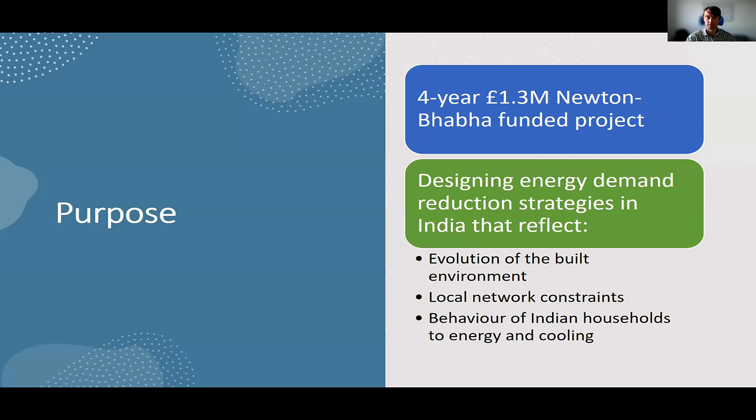So the CEDRI team was ourselves at Heriot-Watt University leading the project, alongside IIT Delhi, NIT Trichy, IIT Bombay, and also a team of industry stakeholders as well. So there's a good mix of organizations, but a good mix of disciplines and skill sets as well. So the starting point, really understanding energy demand in India from a built environment point of view.

So as building modelers, sometimes we do like to think of typical buildings, average buildings, to make things easier for ourselves, particularly when we're looking at stock modeling and energy system modeling and that type of thing. Of course, in India, that's something of a challenge. So these are pictures of buildings that we were looking at through different case studies.

So at the top, we have a fairly recognizable apartment block. In the middle, we have a temple complex, which is in the middle of one of our case study communities, which I'll mention in a minute. And then at the bottom, you have something which is maybe more immediately recognizable as the kind of urban sprawl of urban India, in this case Delhi.

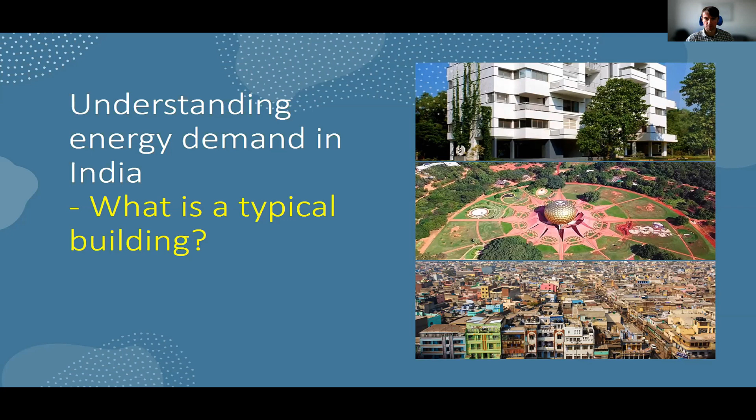So even asking the question of what is a typical building for this kind of project becomes slightly fatuous and not a particularly useful question, actually. And I'll take you through our approach to that in a minute. And then, of course, with India, for a project that's trying to look at future scenarios and where things are going, dealing with the scale of change that's projected across the country, but also regions of India.

So first of all, India is projected to have the highest population of any country in the world, only a few years from now, but certainly that steep growth of population is important to note. And also it's not just an increase in number, it's the makeup of that population, the growth of the middle class, the growth of households with disposable income who might be purchasing certain technologies that we then need to reflect within our building modeling.

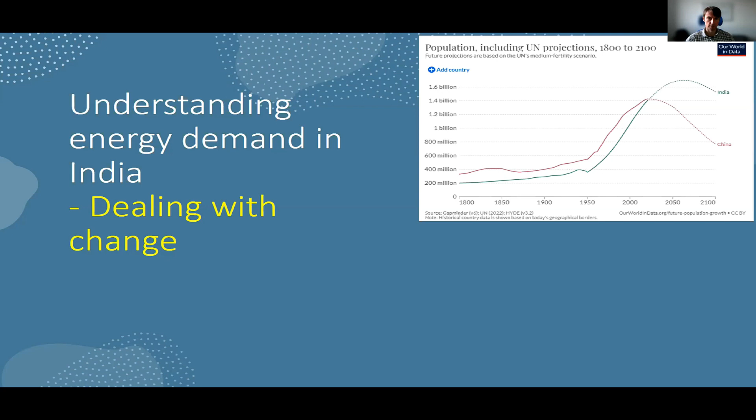These are all things that we have to think about. It's the kind of messy context which as building modelers we maybe would like to avoid, but we have to somehow get our heads around to do good future scenario modeling. Of course, climate change is as important to India as anywhere. The difference with India, particularly if we're looking at cooling, is that there's already very high temperatures being experienced in some of the communities we're looking at, and climate change is exacerbating that problem, but it's not necessarily driving the growth of cooling.

As I'll touch on later, that growth of cooling is maybe coming from socioeconomic factors as much as climate change. And then the overall energy demand in India, some of the projections are quite eye-watering for the next 10, 20, 30 years, and the role of the built environment with that. And then, of course, how the energy supply infrastructure might deal with meeting that demand is quite a challenge.

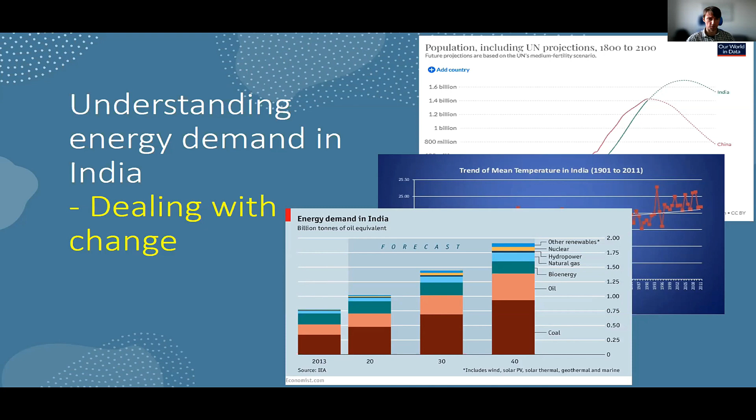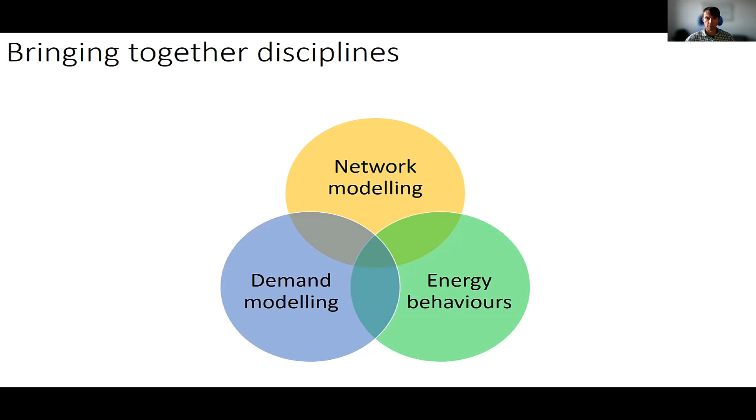So these are all contextual things that we're trying to understand. We can't answer all these questions with a fairly limited scope of a research project, but we do have to try to reflect them in our modeling. And I mentioned in the presentation I gave yesterday, which is a bit more technical, the different strands of the work and the different processes that we went through. So we had these three areas: network modeling, demand modeling, and energy behavior assessment that we carried out within CEDRI.

Within the network modeling, we're looking at network characteristics, how the grid might evolve in the future to deal with new demand profiles, and the resilience of that network to future change. How much upgrading of that network, how much new infrastructure is required just to deal with the expected changes of demand, a lot of which will be driven or certainly affected by the growth of cooling in the residential sector, which is what we were particularly majoring on.

Demand modeling, we looked at different techniques to, first of all, synthesize the demand, and this is in the BSO paper that we presented, so I'm not going to go into this in a huge amount of detail, but essentially measuring lots of electricity demand data for our case study communities, but then trying to synthesize the profiles and the characteristics so that we can perform better aggregation techniques to link individual building assessments with local network level energy assessments. So that's a key part of what we were doing in the project.

And also using, dare I say, a bog standard dynamic simulation to try to understand the impact of various demand reduction techniques, particularly around cooling, particularly around the sort of very complex interaction between ventilation and cooling systems and the choices people make to achieve some level of thermal comfort in their dwellings.

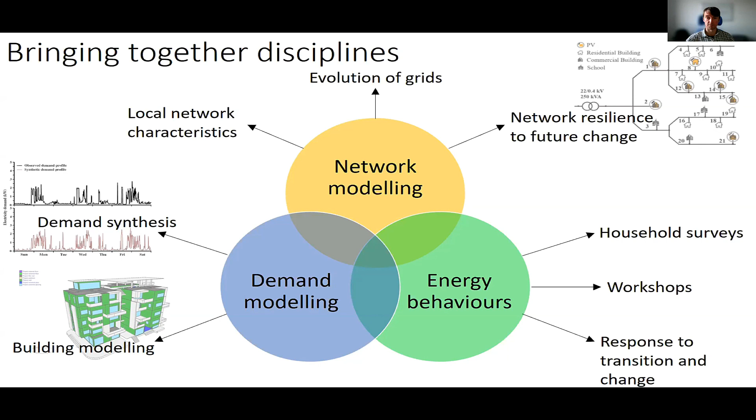So we didn't want to be this project that comes along with some top-down solutions to say, well, this is how you reduce your demand, or this is how you manage your demand in the future. There you go. There's a set of solutions for you to go away with. We want to try to understand the behaviors, why people use energy in the way they do, and try to get the householders themselves involved with that process of designing, in particular, a kind of local cooling strategy.

So our main case study was in Auroville, in Tamil Nadu, in the southeast of India. Absolutely not chosen due to its typical nature. This was a slight concern, I think, from the Indian funders, because they want findings that reflect the whole of India, quite understandably. But our approach was always, you can choose any community in India, and describing it as typical or average would be somewhat tenuous.

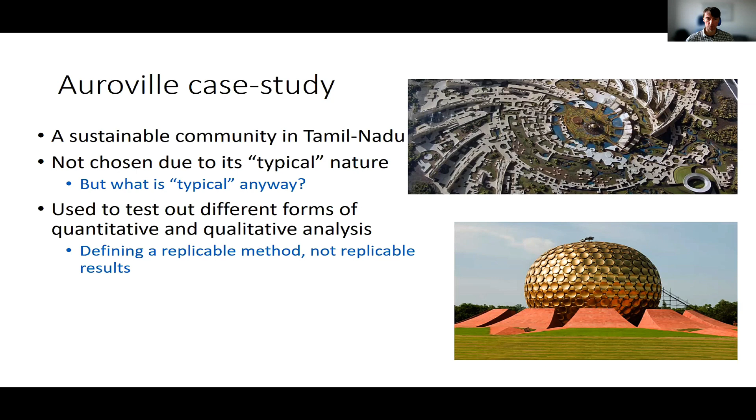So we're not really looking to pull out a case study of hundreds or even thousands of homes and then saying we can extrapolate these answers to the rest of India. We're looking to test out the quantitative and qualitative methods that we're developing with a well-known case study. So this was a case study we've worked with before. And then we're able to potentially run those methods for other communities as well. So we're looking to replicate the method, but not necessarily replicate the results.

And in terms of the kind of questions we might ask these methods that we're developing, let's take a fairly specific one just to take you through some of the processes we went through. So we might be asking, what's the difference between current and future demand experienced by local networks serving a community? So we're trying to understand that evolution of demand and what that means for the local energy infrastructure. And we're taking a fairly building modeling centric role in that.

So that's kind of the starting point of a lot of this. So we have our measured building energy demand data. We have our building physical data. We have a good understanding of the householders themselves through the responses and the engagement that we've conducted. So our approach, and this is a very simplified approach of what we were doing, was to measure and then synthesize the demand for a certain number of buildings that we might need. That allows us to create this bridge between individual building assessments and something that can actually speak to a network level, a local network level model.

So this is a scaling jump that lots of projects have come across, this idea of trying to use detailed building simulation or detailed building data analysis, but then extrapolate that to a level that you can actually talk to the network. So we're talking about hundreds of buildings if you're talking to a kind of feeder substation level. So we're able to do that through techniques that are described in the paper.

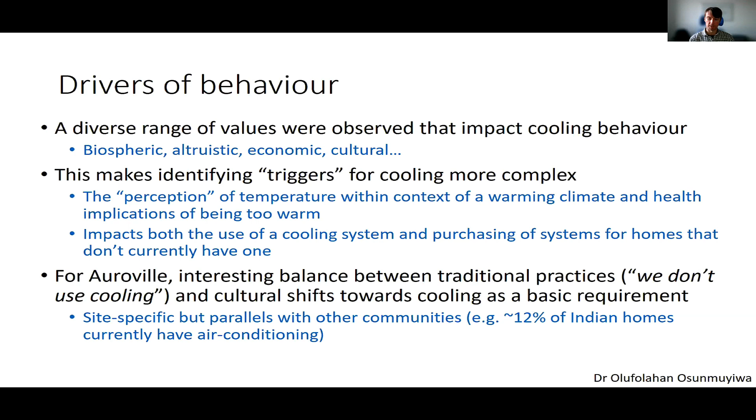So what we're seeing across India, not just this case study, is that we're going to be going from a very low penetration of cooling to potentially a much higher penetration of cooling in Indian homes. And some of that will be cultural changes, some of that will be socioeconomic, just people have more access and more affordability for these technologies. But this is something that's likely to be repeated for different reasons in other Indian communities.

So just to finish off, as I think I'm a couple of minutes over, which Sukumar said was okay, so that's

fine. So CEDRI was trying to combine these qualitative and quantitative techniques for community level energy analysis, and that worked well for the communities that we had good understanding of and good contact with. But of course, the flip side of that is, well, how could you repeat this analysis for less data-rich areas?

There is lots of data around India, but it is slightly sporadic. It depends on a certain area. You'll find one area that is quite data rich, other areas where the building stock or perhaps a high penetration of informal settlements means that you know less about those buildings, and that's a challenge.

In developing countries, clearly defining future scenarios is crucial because of the rate of change. I mean, you finish a building modelling exercise and you question whether your building model is now out of date. So you need to accommodate these external factors that are going on. And unfortunately, or to make matters more difficult, that does mean understanding the occupants and what they're doing, which, as I keep saying, is quite a difficult thing to harness into a sort of traditional building modelling exercise.

And we might question whether building modelers do this. I know we had a discussion yesterday about whether building modelers are literate. There's maybe a subsection there where we discuss whether building modelers understand people or have an interest in understanding people. That's perhaps a separate discussion.

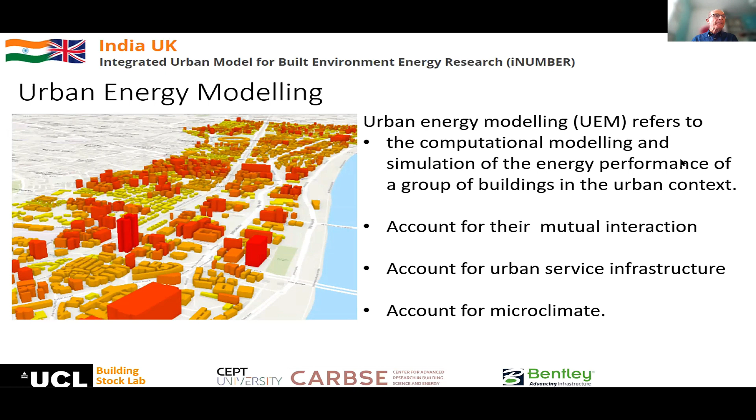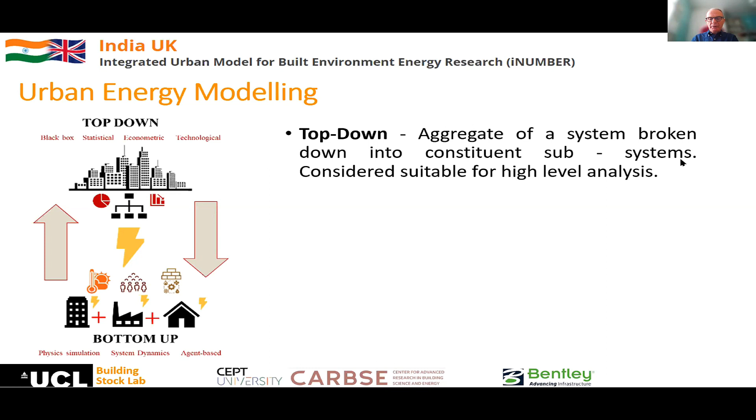When we talk about urban energy modelling, there's often this debate about top-down and bottom-up, and a lot of the work that's done on understanding the energy performance of the building stock is top-down. It's statistical. It tends to be a little bit of a black box. It divides up the energy use at national level into segments of the stock, be it domestic or non-domestic.

But we also have a sort of hybrid form of modelling where we have representative archetypes of individual buildings, different types of homes, different types of non-domestic buildings, which we model and then scale up to represent the stock. And that technique is useful when it comes to understanding possible generic solutions or generic approaches to improving segments of the stock. But it doesn't help if you want to actually look at things spatially and look at the interrelationship between buildings and understand the buildings in context.

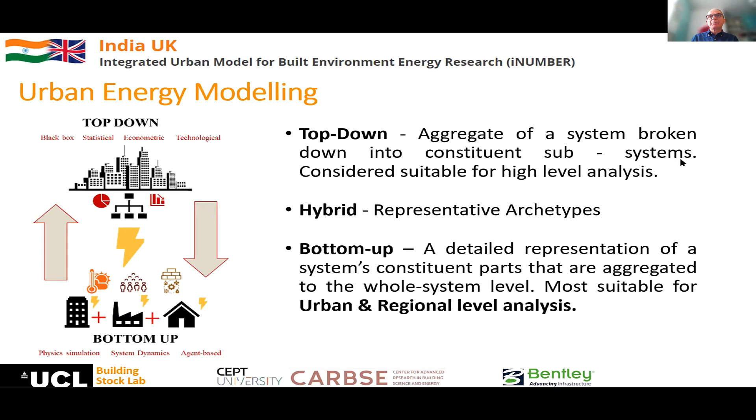And for that, we need really a bottom-up approach that takes a much more detailed representation of the buildings and systems that operate in an urban environment. And these models have been in development for some time. At UCL, we've been developing three-dimensional digital models of the entire building stock for close to a decade now. And if you look at where these models are, you'll typically find that they're in the Northern Hemisphere.

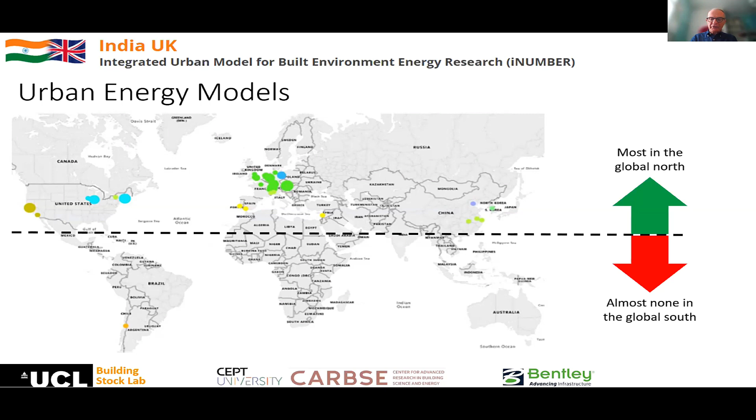And they tend to benefit from the fact that in many cases there are good data sources, and they also represent an approach to modeling which relates to particular climates. There's virtually none in the global south. The data sources and the sort of climatic challenges are somewhat different. And we felt within the project, the iNUMBER project, that we needed to address this, that we needed to start to think about how these urban scale models could be developed for locations in the global south.

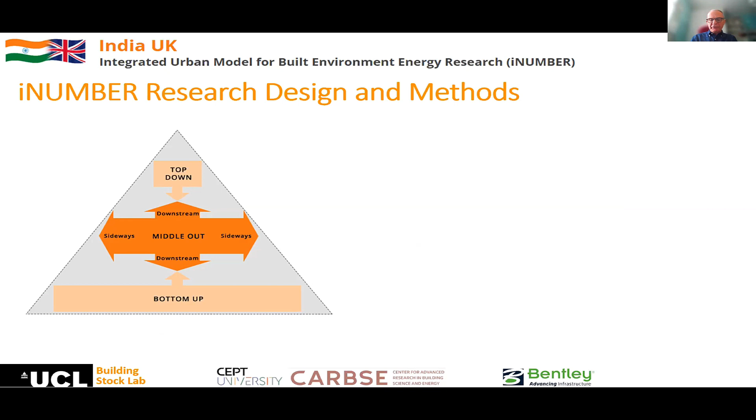And in order to do that, we looked at this model of top down and bottom up and decided that what was critical was to have a middle out. We needed to understand how we can bring these things together in a modeling system, to take account of the building stock in the city, to look at the municipal energy services, and also to understand in a little bit more detail the actual residential energy use.

So the project involved three primary work packages: modeling the building stock and producing a digital representation of it. Work package 2, which brought in the municipal services, in particular water supply and pumped water supply, which is a very important energy use in Indian urban situations. And work package 3, which actually involved monitoring of performance of individual residences in areas in Ahmedabad.

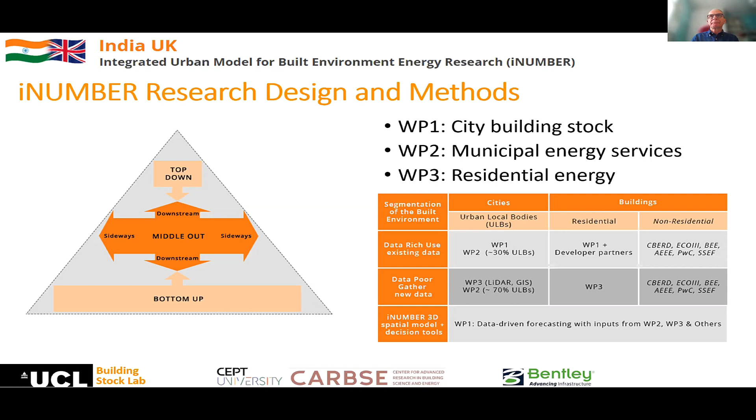For non-residential buildings, we were able to draw on prior work that had been taking place at CEPT University from projects like CBERD. To undertake the analysis of the urban fabric and to understand the makeup of the urban context, we employed some techniques of photogrammetry to gather large area photographs from different angles, so that you can produce a very detailed composite visual image of the urban fabric.

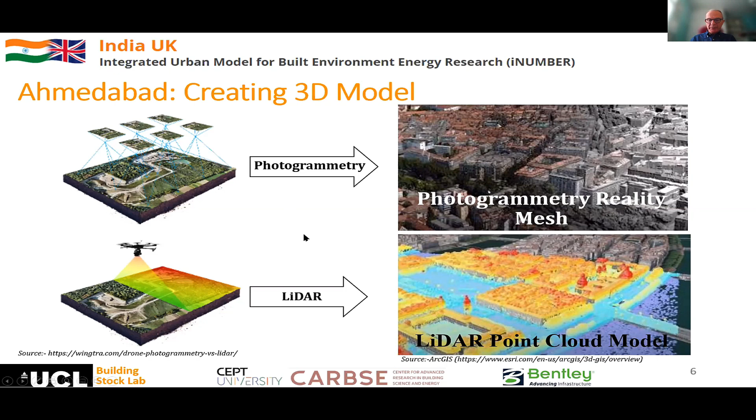The illustration at the bottom shows how you can do this also with LiDAR, and that's the way typically we do it in the UK when we're building our models, because we're very fortunate that the Environment Agency in the UK undertakes a fixed-wing LiDAR survey of the whole country. That doesn't exist in India, so we've had to use a drone flight system where we have gone out to individual areas of the city and flown drones backwards and forwards, capturing this photogrammetry information. Now, that's a reasonably time-consuming exercise, but worthwhile given that it captures such a rich level of detail.

But of course, photographs are interesting to look at, but they're not much use when it comes to producing a digital model. So using technology provided by Bentley Systems, we're able to translate these photographs into a three-dimensional digital mesh that provides us with detailed information about the shape and size of the buildings, which can then be overlaid onto the building footprints from other sources.

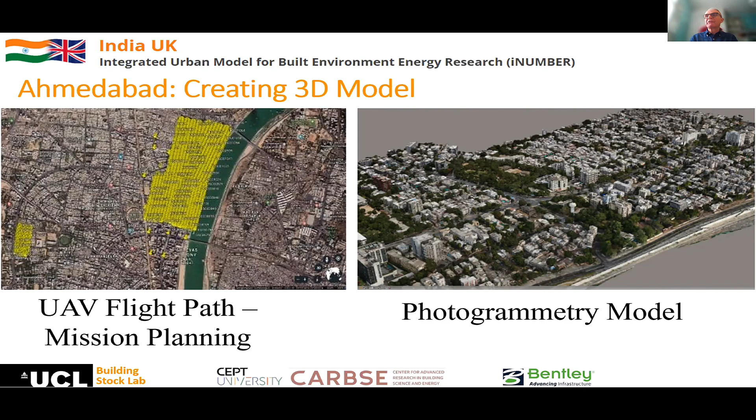But one of the key challenges here in an urban environment such as Ahmedabad, where we have a lot of trees and other material around the buildings, which can in some cases confuse the picture. You don't necessarily understand where the buildings end and the trees start. You have to try to disentangle these in order to get a much cleaner three-dimensional representation of the building.

And a large portion of the work that was undertaken in iNUMBER was to develop methods in order to do this using machine learning and artificial intelligence. And those have actually been proved very successful, and they also form a legacy that can be used in other contexts now.

To build the full model, you don't just need the digital representation of the shape and size of the building. You need also to bring into that the description of the construction materials, the amount of glazing, and quite obviously also the way that the buildings are occupied and operated. Sometimes you can get additional data on some of these factors, but mostly you're making assumptions or using data that comes from the sorts of case studies that David has just described, and evaluating sensitivities and scenarios in order to develop meaningful results. And this is just an illustration of the workflow that goes into producing the final models here.

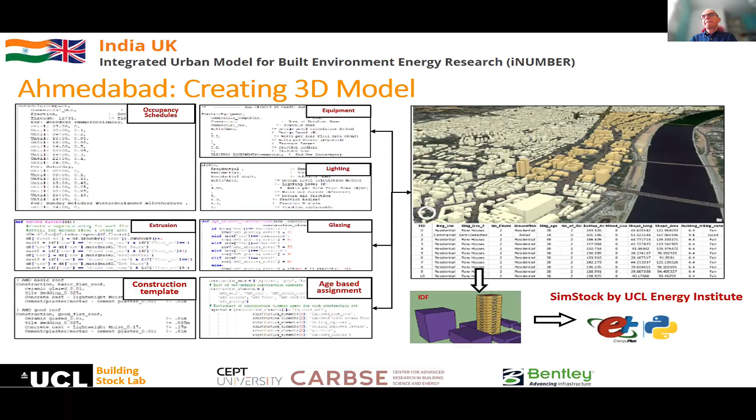So the iNUMBER project finished a little while ago, and the model that has been produced is now being used for these types of scenario analysis in collaboration with the city of Ahmedabad. But it also produced some very useful relationships between UCL and CEPT University and other parties, such that we were able to move on and develop further projects, which I think is always a valuable aspect of any research project.

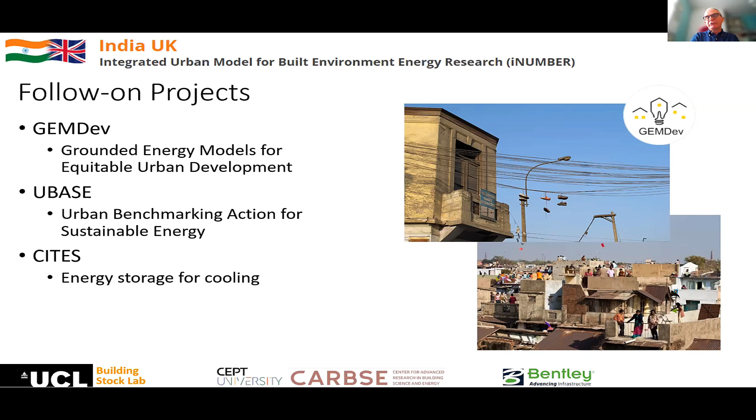And finally, relating to the subject of cooling, which we know will inevitably increase in India, as David's already pointed out, looking at techniques by which cooling energy can be stored in order to distribute and minimize the peak demands on the grid. There's a project called CITES, which is also spawned from the iNUMBER project.

So that was a quick summary, not as detailed as David's, but I'm happy to answer questions in the Q&A session. Thank you very much.

Brilliant. Thanks, Paul. I think it just goes to show just how diverse and varied the approaches are across the projects, and also the shared similarities, especially in terms of the central challenges that each of us has explored.

So there aren't any questions in the Q&A channel yet, so I think I'll defer to Rajat to present RESIDE. So Rajat's already started sharing his screen, so over to you, Rajat. Can you see the slide mode? Yep. Okay, great. Yes, I can. Okay, good.

First, I'd like to thank Sukumar for bringing us all together as this kind of cohort of projects that got funded. So thank you, Sukumar, for the session. It's really good to see what all we've achieved actually over the last 4 or 5 years.

So what I want to do is talk about RESIDE, which is one of the 4 projects. This is particularly focused on residential building energy demand in India. And this is led by Oxford Brookes University in the UK with IIIT Hyderabad, Vishal Garg, and MNIT Jaipur, Jyotirmay Mathur.

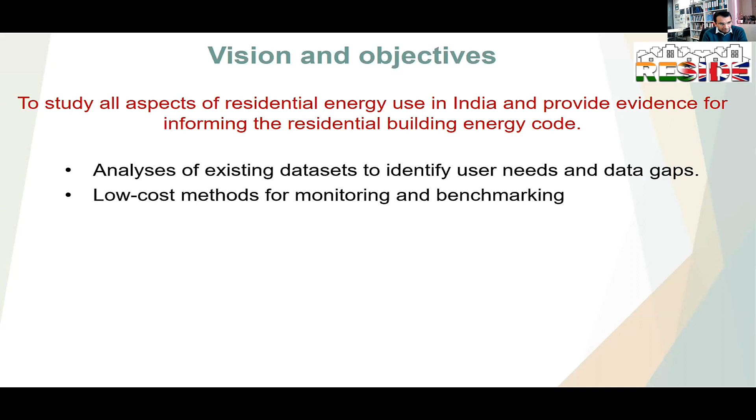And to do so, we had a number of objectives. So we started with analyzing what data sets were there in terms of residential energy and thermal comfort, and what were the user needs and data gaps. We wanted to develop low-cost methods for monitoring and benchmarking. We established energy demand patterns.

We also then looked at smart home energy management systems and undertook studies of recently built dwellings through post-occupancy evaluation methods. All the data then was designed to feed into models, both at building and community level. And constantly the purpose was to provide policy support for the residential energy code.

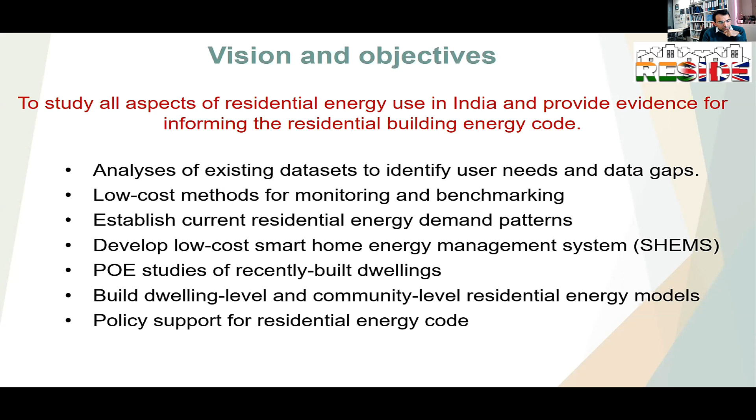We developed a range of tools. We think they are quite practical, ranging from an online repository on residential energy and thermal comfort studies, an online survey approach to be able to gather socio-technical data on residential energy, a dashboard on visualization and analytics of the monitoring data, and mobile apps to provide energy feedback and smart control.

We also managed to get a smart home annex in the residential energy code and develop archetype models which could be used going forward to run different scenarios. We were passionate about developing data sets, not just papers and knowledge and tools. So empirical data sets have been created, which can help with some of these measurements. And then obviously stakeholder engagement all the way. So I'll take you through some of what we have found.

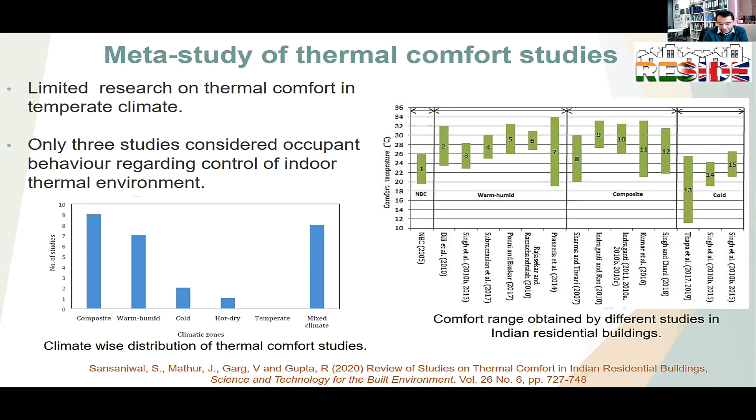In terms of new knowledge and insights, we started off by looking at what was out there. And that was looking at thermal comfort studies. And we found that there was very limited coverage across different climatic zones, especially temperate climate. Very few studies considered occupant behavior. And the studies that considered it were giving very different results, with very different ways of data collection as well. And that got published as well.

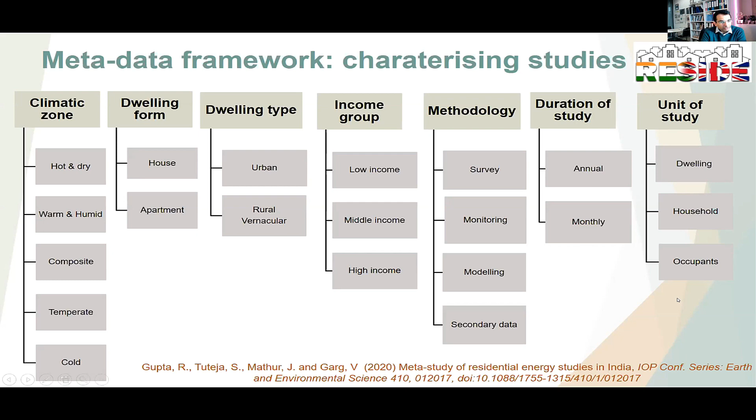So we put forward this metadata framework to characterize studies: how do you look at dwelling type and income group, what methodology they were using, how long, what was the unit of the study, and whether they were occupants, household, or dwelling.

We also then started our large-scale monitoring campaign with a pilot study, which was about 20 dwellings in Hyderabad. And that was very useful because that gave us an idea of not just what was coming out in terms of findings, but also our methods. And obviously, some things were unexpected. Air-conditioned homes were using a lot, about 200% more in the peak period.

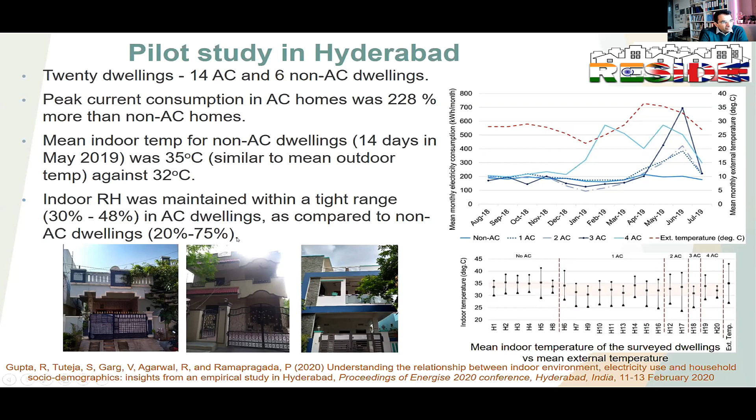The indoor temperatures were all much tighter and had a narrower band in air-conditioned homes. The same with relative humidity as well. But interestingly, what we found was when we started to do the field studies, there were lots of issues related to technology. So initially, we had thought of using internet connectivity, but because of this, we realized it needs to be more local and Bluetooth enabled, because internet is not getting around all the time.

There were also technology-to-person interaction issues and challenges, where we were trying to put these loggers on the main circuit board, and that's not always easy in an Indian context. And where do you locate these loggers? And then also person-to-person interaction. The electrician we hired for installing our loggers was being used by householders to do additional electrical works. So how do you manage those householder expectations without jeopardizing their participation? Those were very practical issues that emerged from starting to do this kind of field work.

We then, as the data came in, started to look at socio-technical factors that influence residential energy use using regression models. And we found that number of occupants, presence of air conditioning, income group and size had a big effect on residential energy demand. We also looked at the relationship of residential AC with indoor temperature and relative humidity.

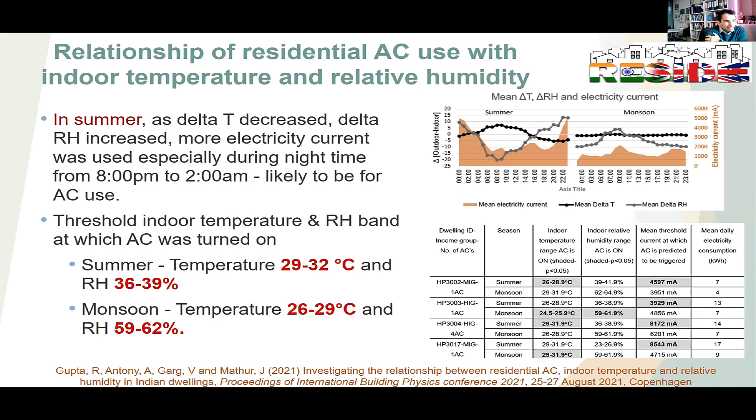We were trying to find trigger temperatures at which air conditioning would come on. And it really was showing in the summer and monsoon season that at about 29 to 32 degrees with a relative humidity of 36 to 39% was around when air conditioning was being turned on. Slightly lower temperatures in the monsoon season, but higher humidity. And then we compared that against what the National Building Code said, and clearly there were savings potential there.

We then also looked at a large data set, just under 5,000 households, to really look at this variation in electricity use across all climatic zones, different seasons, income group, presence of air conditioning. And the variation was prevalent. That is something that needs to be accounted for in the energy code. At the moment, it's a single energy code for the country, and it needs to account for climatic zones, seasons, income groups. And that's important for the take-up of the code.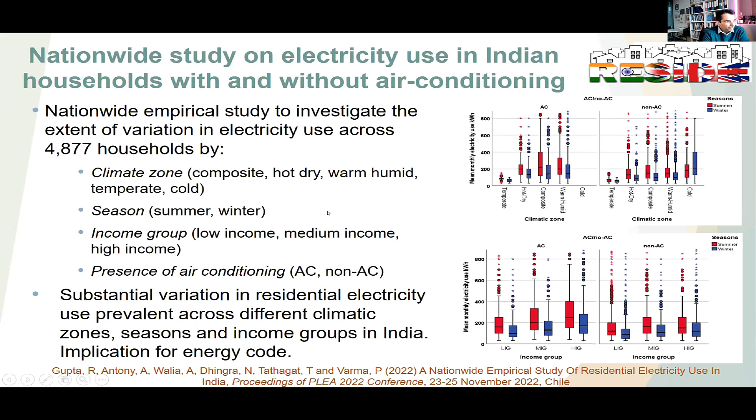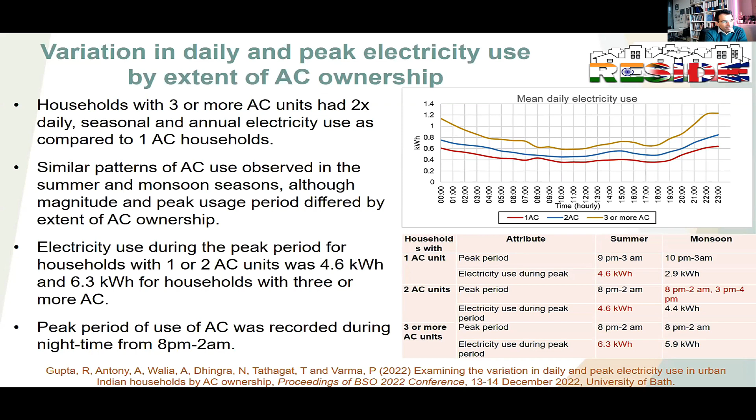In fact, homes with 3 or more air conditioning units can have double the amount of daily, seasonal, annual electricity use. And in the peak period, they could be using over 6 kilowatt hours from 8 p.m. to 2 a.m., which could be dropping to 4 kilowatt hours for homes with fewer air conditioners. As home working becomes more prevalent, as more homes start to get air conditioned in multiple ways, this is a problem which will need to be addressed to avoid brownouts and blackouts.

A number of papers, again, like other projects, have been published. They're available on the website. And then we got some recognition. One of the papers won an award at a conference, so that was quite good for the Indo-UK partners. And then there were a series of technologies that came about. I think this is particularly something we are proud of.

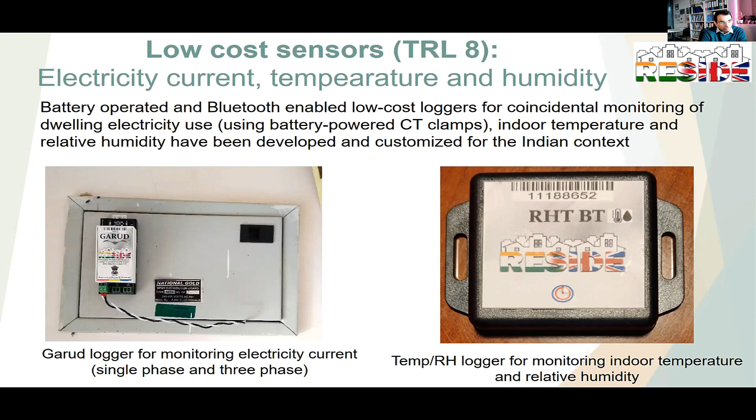This is a low-cost logger for monitoring electricity and indoor temperature and relative humidity. It cost about $20. It wasn't easy to develop and test and calibrate, but it's much cheaper than what we use in the UK and was necessary for doing a large-scale campaign.

We also developed the smart home energy management system, which has got its own energy meter, window opening and closing sensor, humidity sensor, smart sockets, and occupancy sensors to help with smart management of energy use, and it's being deployed in 10 homes now. Before that, we had a test bed for the system in the lab to test out what works and what doesn't work, and that was a very interesting exercise to do.

A lot of tools came about. We started off with this online repository of metadata, so you could do customizable searches based on what papers had been published on residential energy and comfort. We also developed an energy survey protocol to enable large scale data gathering, and different survey forms and other things have been produced, and they're available online.

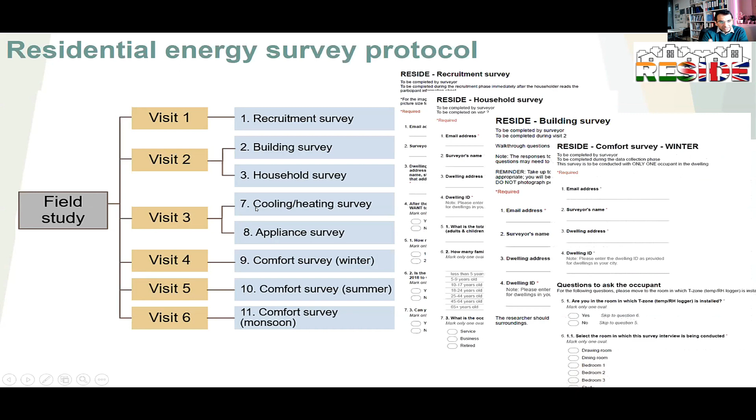Building survey, household survey, cooling survey, appliance survey, to really provide that contextual information to understand what is happening and why is it happening, alongside the monitoring data. We've also created this dashboard to bring the data together to enable users to query the data in their own ways. We can't write all the papers, we can't create all the research questions, and there are many more out there. And from day one of the project, we've been passionate about making things open.

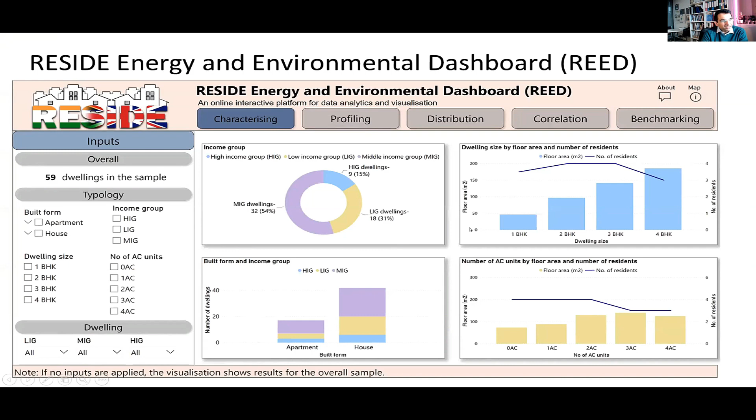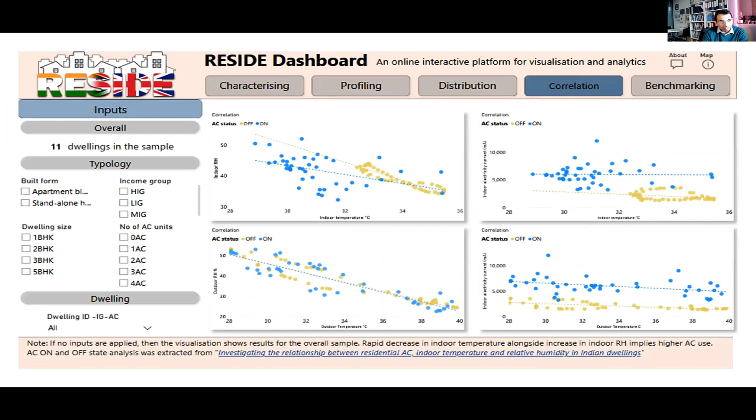So you can take the data and characterize it. You can profile it and do your own selections in terms of what periods you want to see in terms of indoor temperature, electricity, relative humidity. You can start to do some queries on distribution, scatter plots and other things. And then also start to benchmark it. So try and see the indoor temperatures of those homes, which you can search by built form, income group, dwelling size, number of AC units. How does that compare with IMAC? Or with the NBC, the National Building Code maximum, minimum.

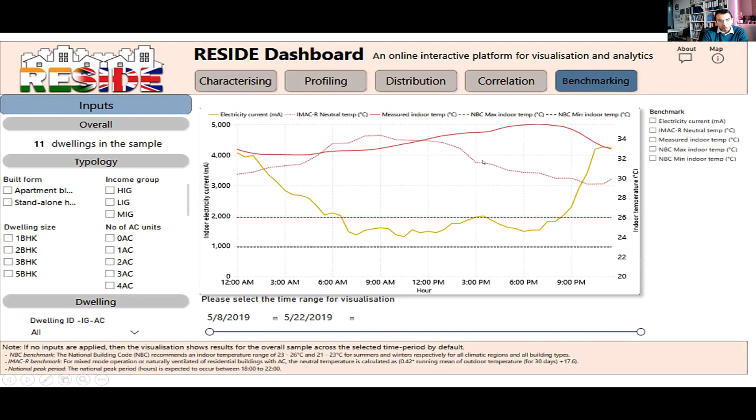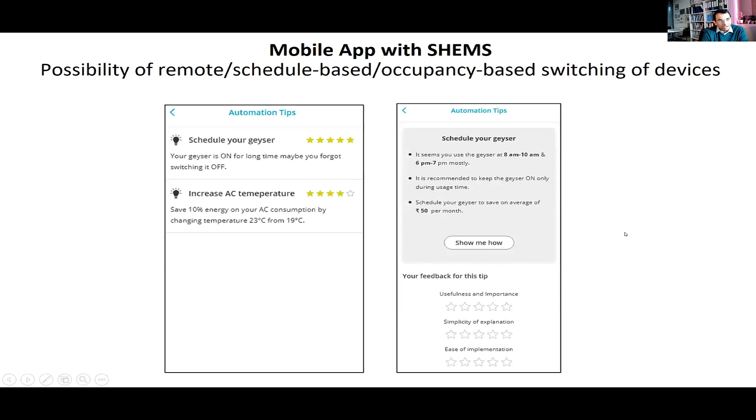We also created these mobile apps with accompanying smart home energy management systems to provide trend analysis. These were given to householders on their mobiles, so they could see how they were performing themselves, how they were performing against their own neighborhood. And then some smart controls, how they could schedule the geyser or the air conditioner. And then just to end, in terms of policy support, I think we were very fortunate that we managed to get our Annex E smart home energy management system insights into the code itself.

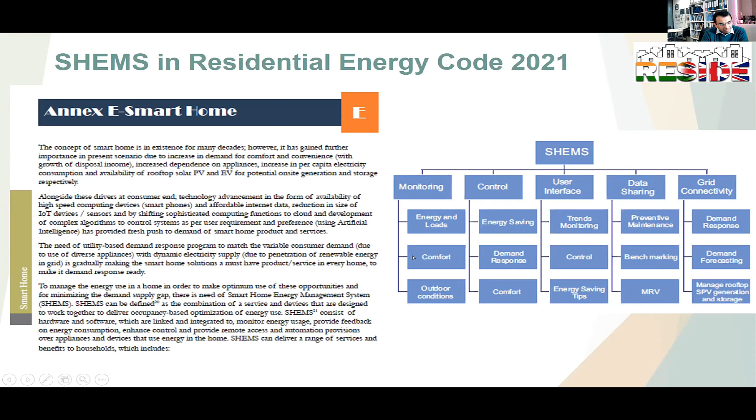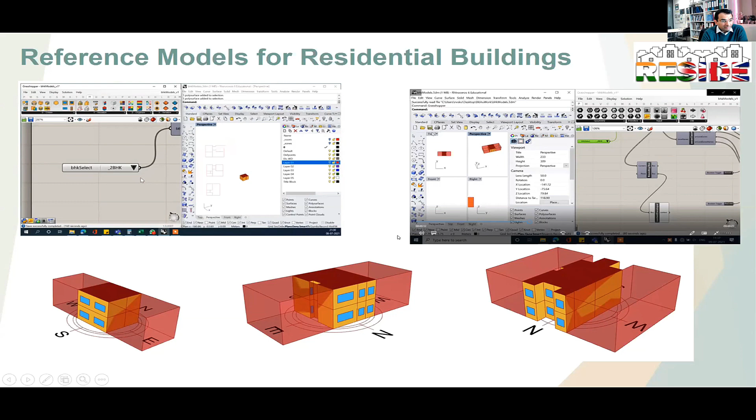Apologies for that. So we managed to get this Annex E in the policy document, which I think is an achievement of the project, covering different aspects of smart home energy management systems. We've been creating residential building archetypes that can be used for different scenarios for seeing what building energy demand reduction is possible for different types of dwellings. We've also created data sets, which have millions of data points. And in the next year, hopefully we can release some of that for wider consumption and usage by the academic community.

And then finally, stakeholder engagement has been absolutely essential. It's helped us in refining our own methodology, keeping in mind that India is very diverse and varied, and how we need to keep everything anonymized despite our large scale data gathering exercises, and how necessary that is for future policies. There is a website where most of what I've said is available.

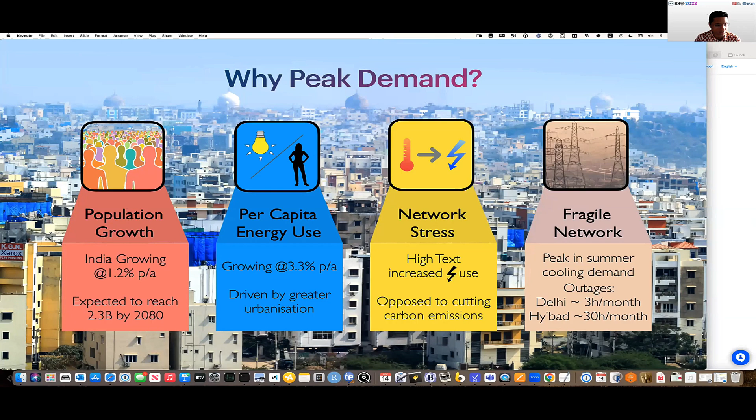So obviously that's not great, because if you're firing up coal or gas to manage that peak load, that's not really great in terms of cutting carbon emissions. And of course, that creates fragility in the network itself. Even now, in parts of Delhi, even though things have much improved since I was a child, we get significant outages of maybe 3 hours, and in some other parts of the country maybe even 30 hours a month. So it isn't just simply access to energy, it is the quality of energy supply, the stability of the supply, and things like fluctuating voltages that are a huge issue.

Now, the fact is that the growth in demand far outstrips the growth in supply. So even if you have access, you might not actually be able to meet your comfort needs. And this resulting loss in productivity and economic growth, someone has measured to be approximately 5% of India's GDP per annum. So whilst mean demand is increasing, at the moment mean demand is only about 13% that of the UK. So per capita, an Indian household is only demanding about 13% of the energy that a typical UK household might be demanding. But peak demand is obviously a huge problem.

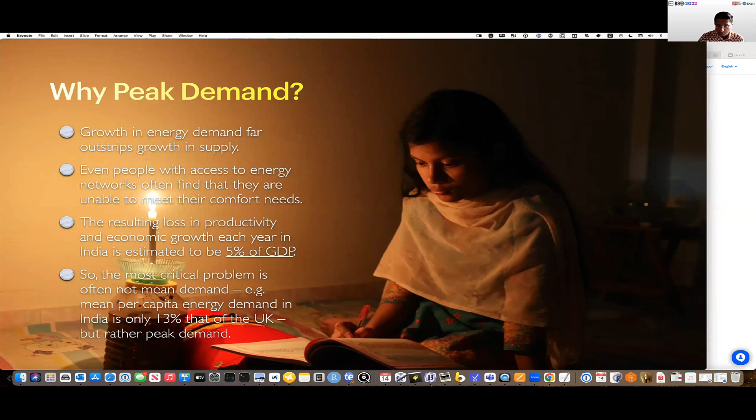So we came together as a bunch of universities and institutions. Bath is the UK lead on the project, and IIT Roorkee, and Rajasekar is here with us on the panel today, is the India lead on the project. Rajasekar and I had previously collaborated on smaller endeavors, and that's how we were able to build up this relationship. In addition, CBRI, the Central Building Research Institute, also based in Roorkee, came in, as did IIT Delhi. So this was a large team that was assembled.

I haven't mentioned everybody's name, just in the interest of time. Looking at the research questions on the right-hand side: how much peak and mean demand reduction can you actually achieve using different techniques? To what extent are these actually different problems? What are the technologies that are appropriate given India's climate, society, wealth, materials, and skills? And are there any disbenefits in terms of heat stress, particularly under future climate? So these were the broad motivating research questions.

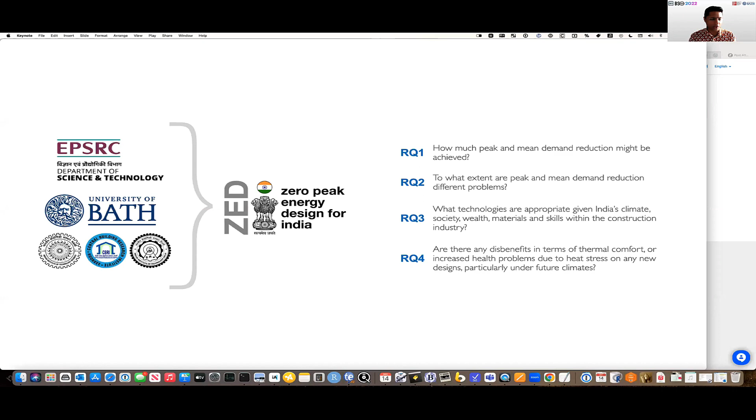I haven't put together a list of the work packages, because I really would like to jump in to talk about some of the outputs we've got. But I would like to highlight some of the possible attacks on the problem we might have taken. Some of these were addressed and others remain unaddressed as part of our work. But I know some of the other projects we've already heard from have been looking at, for example in the bottom left, issues around control, feedback, and things like that. Rajat just talked about it. Comfort has been a major aspect of work. Rajan talked about it yesterday.

And construction, super insulation, thermal mass. David mentioned some of those aspects. And David also mentioned, for example, issues around location and culture, differences in practices and needs.

And I think with David's presentation in particular, it was remarkable that even in a community like Auroville, where you've actually got maybe the most committed, seemingly committed environmentalists who initially came in with the attitude that, well, actually, we don't need air conditioning, even if they are moving towards greater demand for air conditioning, that is a very clear sign that this is going to be an extremely widespread phenomenon as incomes rise and as people negotiate new sort of paradigms of comfort.

The thing that I want to just talk about today, we did touch on some of these aspects ourselves, and Rajasekar will probably be talking about these as well. But the ones I want to just pick up are looking at weather data, because if you're to design buildings, and we have to remember that something like 50 to 60% of the buildings of the future in India are still to be built.

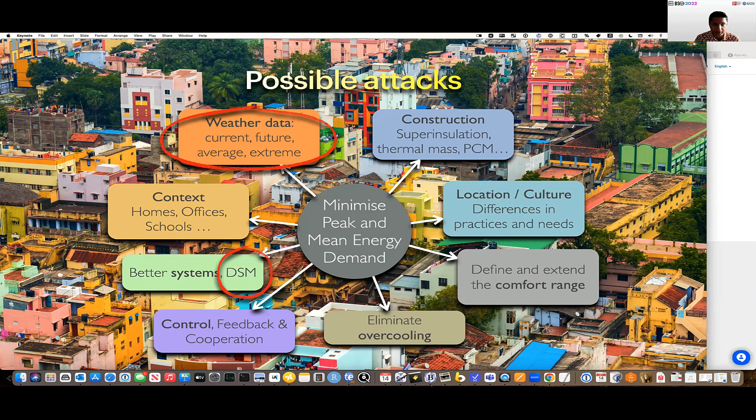The second one was actually the last work package on our project, and it turned into some rather interesting stuff around demand-side management, and I've got some high-level stuff to share with you on that. So just these two for today. Weather files is the first one. So what about weather files?

So as many of you know, these are standard inputs in simulators such as EnergyPlus. The other speakers have already mentioned EnergyPlus as one of the standard simulators, but there are many other dynamic simulation software out there, and weather files are absolutely a core input because the external weather signal defines in a very fundamental way the performance of the building.

The problem is that in India, the weather files that exist, which come from ISHRAE, they cover just 62 locations. But we know from work in the UK, for example, that it's possible that you might have rather large errors in estimates if you don't use localized weather. So something in the range of about 30 kilometers. If your weather file is further away than that, then you're at risk of making a prediction that's really not commensurate with what the building will actually experience.

So this is what the picture looks like at the moment in India. And I'm aware of a project, I believe that this is actually being improved by ISHRAE as we speak. I think it is going to something like a 100-kilometer grid, if I'm not mistaken. But the problem of geographic coverage is only one dimension, because in each of these locations, what you've got is a representation of a typical weather year in the form of a TMY.

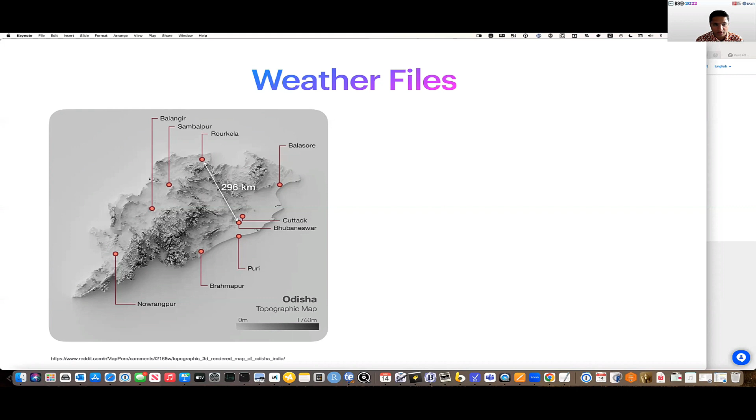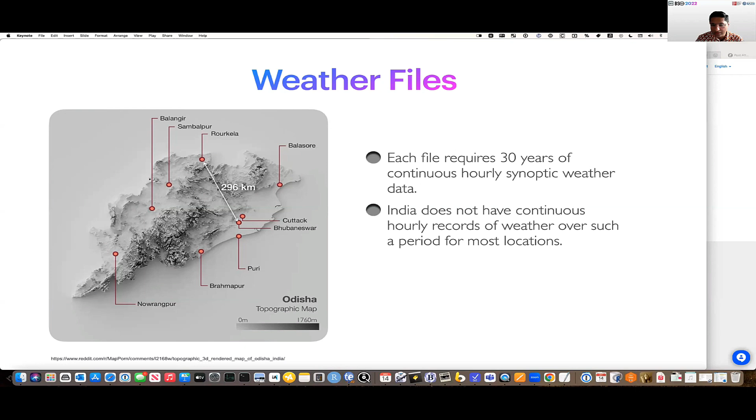So the problems are that we've got this requirement for 30 years of continuous hourly synoptic weather data. These data simply don't exist in India. So much like previous work in the UK, we said, well, perhaps we can solve this using synthetic computer-generated weather data. So we worked with the UK Met Office, who gave us a data set from their PRECIS product, and that covers all of India at 25-kilometer grid resolution.

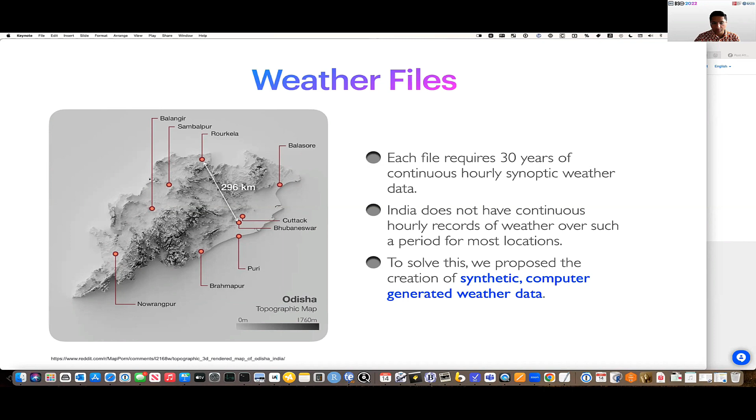With weather data going from 1970 all the way to 2100, covering pretty much all the synoptic variables, and over 17 ensembles. So you've got 17 different perturbations of the underlying physics model. So there was a good amount of variability within the data that we got, from which we could construct probabilistic data sets.

So without going into the technical details of how the files were produced, because we spent an absolutely enormous amount of time making sure they were fit for purpose, it was a significant challenge, and one I think we didn't quite appreciate when we began the project all those years ago.

So what we've got are these 25-kilometer grid resolution weather files, which means that for every 25 kilometers of India's land surface, you can have a bespoke weather file. And not only that, you can have the weather file representing current climate, which is, I think, 1980 to 2010, if I'm not mistaken, which we call the 1990s weather file, and then something in the late 2080s.

So these are represented in the test reference year format. And following on from previous work in the UK, which some of you might be familiar with, these are actually represented in probabilistic terms. Here we go. So 10th, 50th, and 90th. And this is what we've actually done.

So this is a representation of the average summer temperature, which we've taken as March to June, just a sort of norm for 1981 to 2010. And we've marked out Rourkela and Bhubaneswar, which I presented to you in the earlier slide. Wherever you see these little white gaps, those are areas where we are simply not confident the data that we got from PRECIS was fit for purpose. So we've actually left those out.

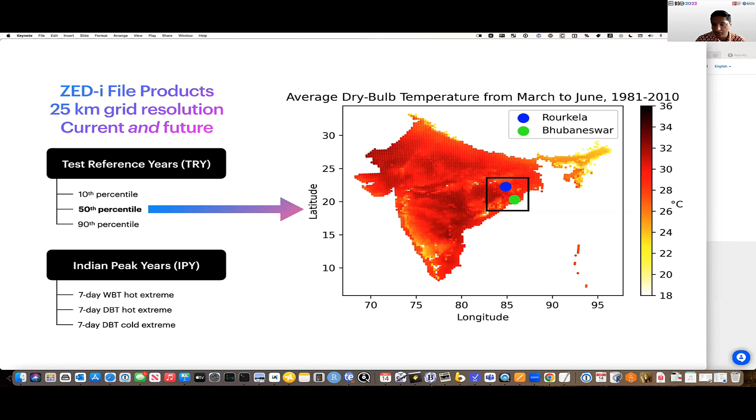But what exists on the server at the moment, and you can download these right now, are the 50th percentile test reference years at this resolution. So let me just show you what that looks like for Rourkela and Bhubaneswar. At the moment, all that exists in this part of the country is that green dot.

And you can immediately see that not only is there a huge amount of weather variation, climatic variation between adjacent cells, but also that things are going to look rather different in the future. The temperatures you're seeing are summer average temperatures for these periods. On the left-hand side is 1982 to 2011, and on the right-hand side is the 2080s.

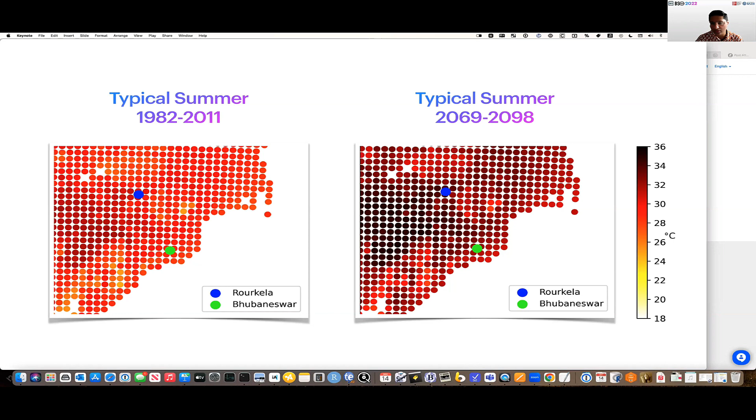So you should end up with this website here, which is zedi.bath.ac.uk. This is the same place where, by the way, we host our UK weather files, which are actually at the 5-kilometer resolution level. So the same website hosts both our UK and India data. All you do is click this Get Started button, choose your country of interest, set the latitude and longitude, which I've cleverly kept a copy of. This is the latitude and longitude for Rourkela.

And it asks you a couple of questions, whether you're using it on a real building project or for academic research. So I'm just going to say no here, and I'm just going to say BSO2022 demo. So that's just so that we can keep a track of where these data are being used. So we encourage people to use them because the data are completely free. And apart from that little bit of data collection, you don't have to do anything. So when you do that, you're able to download your data.

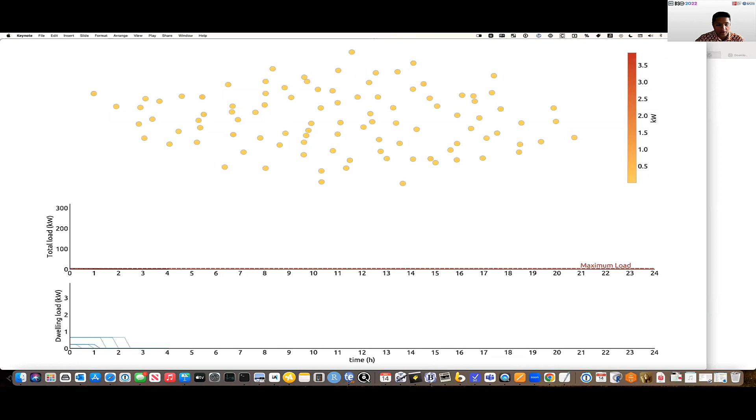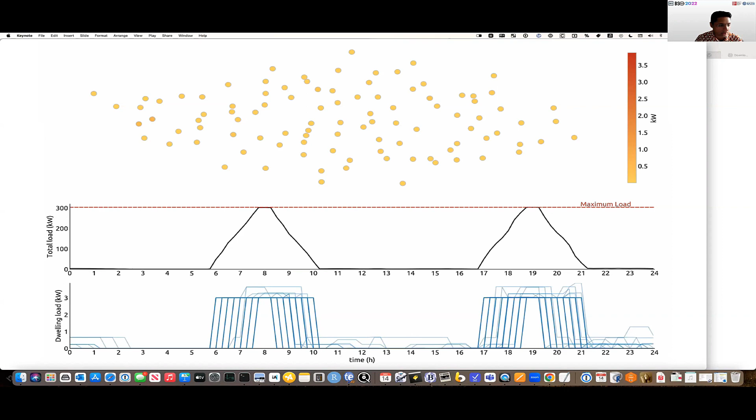that home. So you can see here, it's the morning, and then somebody turns on the heating or cooling or whatever. This could be a typical British home, and then boop, you get a whole bunch of other things. These are just nominal loads, not meant to be necessarily terribly realistic at this point, but we investigated many, many different scenarios as part of the agent-based model. So this is what a typical load profile might look like, and you can see it peaks out at about 300 kilowatts. There are, I think, about 100 homes in this particular set.

But what happens if you actually connect some of these homes up, i.e. each home knows a little bit about what its neighbors are doing, i.e. the amount of power draw in its local neighborhood. And you can define this local neighborhood in many ways. We looked at many different types of connections and many numbers of connections, and we found that actually the most optimal connection was just 4 homes.

If you have 4 homes sharing information with one another, and they don't have to be co-located, you see. They don't have to be with your immediate neighbor. They could be anywhere within your local distribution network. So that's what you're seeing here. This is one particular representation and one particular type of connection between neighbors. And one of the remarkable results actually is that the results you're about to see are totally agnostic to the nature of the connections between these dwellings. We looked at many different mathematical ways to define these connections.

So here's what actually happens if you connect a bunch of homes up and you let them do their thing. Each home is making autonomous decisions in the presence of very little information about its neighbors. All it knows is what the maximum load draw possible is in its little neighborhood of 4 dwellings, and what each neighbor is drawing at a given moment. And then it takes a decision on whether to draw some loads or not.

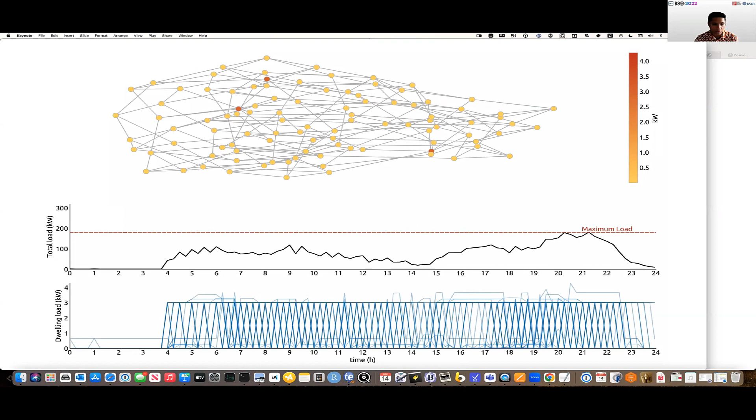So the main outcome from that was that a remarkably small number of connections between homes can actually, over the whole network, result in rather large reductions in peak load. Even in the most unfavorable circumstances, it looks like an average 31% reduction is achievable, although you can see the standard deviation tends to increase quite a lot under these unfavorable situations. So that was really nice.

But then we asked the question, what happens if you add heating or cooling loads? Because those, unlike, say, a dishwasher, are very much dependent on the external signal. So we said, well, what if people were a little bit flexible with when their air conditioning or heating turns on? And with just a 1-hour flexibility in typical schedules, you can actually drive down peak load demand by 44%.

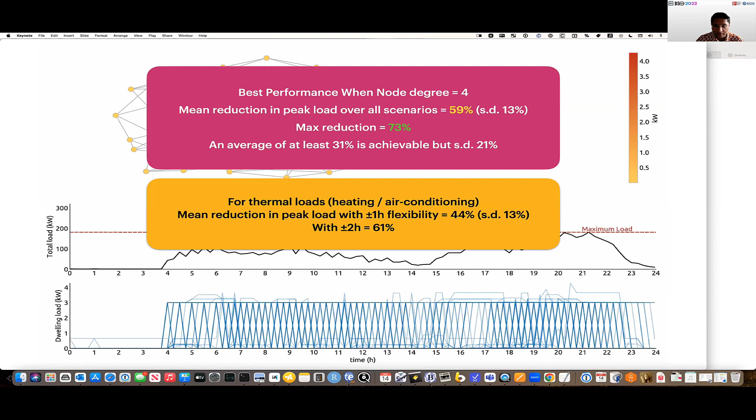I haven't shown data on ramp rates, but even there we saw some rather dramatic reductions are possible, something like a 1/3 reduction in ramp rates. A ramp rate, for those of you who don't know, is the speed at which the demand spikes on the network. Obviously, the wider the window of flexibility, the greater the savings. So if, instead of turning on your heating at 7 a.m., you're willing for it to come on at 5 a.m., a 2-hour flexibility, and a large number of homes were willing to do that on an automated basis, you could save nearly 2/3 of your peak load demand.

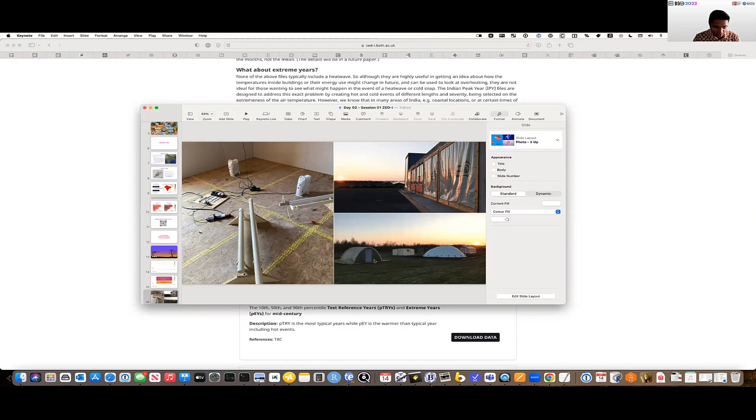So let me just stop that because I've inserted this. Let's insert that back. So we've actually sent this to test in our facility at the Building Research Park in Wroughton, which is about an hour's drive away from Bath. On the bottom right, you can see some fascinating structures, which are actually part of a different project to do with healthy housing for refugees.

But dotted along that site are several test buildings that we co-opted for our purpose, including the test cells at the main hive building, which only have one exposed face, in the top right. In the left-hand picture, you can see some of the instrumentation we put in there, essentially just a bunch of electrical loads. We're still analyzing the data here, but let me just make that a bit bigger.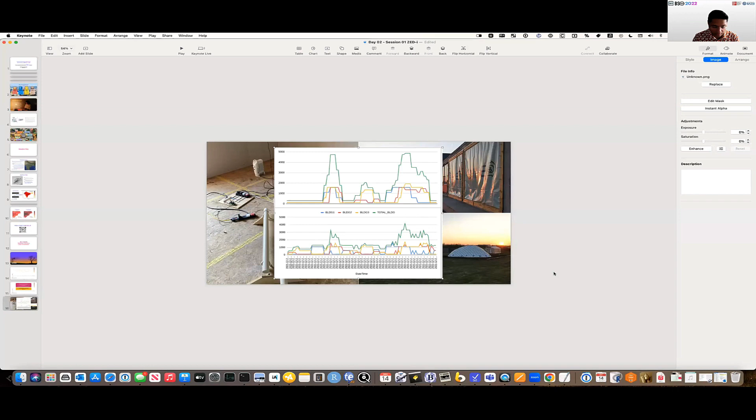We found actually that we are able to replicate those results from the ABM in what is a very small network of buildings. So these are only 9 buildings overall in this entire group. And this is in fact just a group of 3 out of those 9 that are operating within a mini neighborhood. So I think those were just the 2 sets of results I wanted to show. I hope that was of interest.

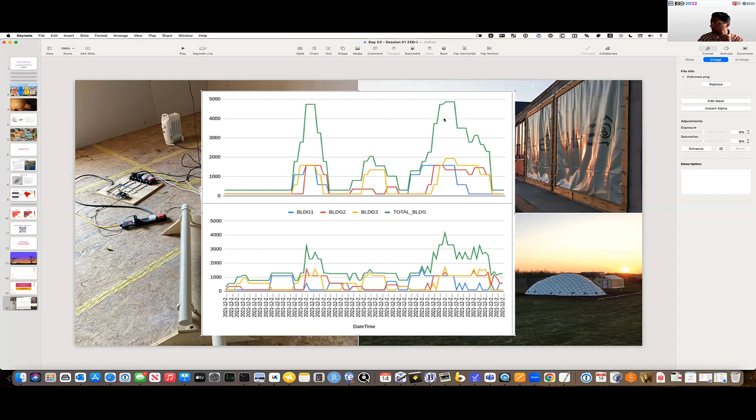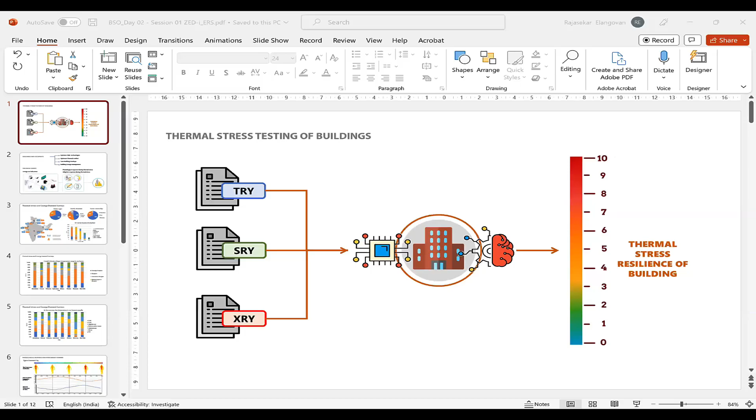And at this point, I know I've consumed quite a lot of time, but I think we're still doing okay for time. I think we can have Rajasekar present some other work from ZED-i. Let me just see what timing is looking like. I should have finished 15 minutes ago. Bloody hell, I've been speaking for a long time. Sorry about that. Rajasekar, do you want to go? Yeah, thanks, Sukumar. I'm just sharing my screen. Is my screen visible in slideshow mode?

Yeah, thanks, Sukumar. Just want to connect the dots, add up to what Sukumar was talking about and a lot of other discussions from the rest of the projects. So we have now interesting weather files, very close resolution for India, a good leap from 60-odd files to about a few thousand weather files. So we are looking at typical files, extreme files, and future files.

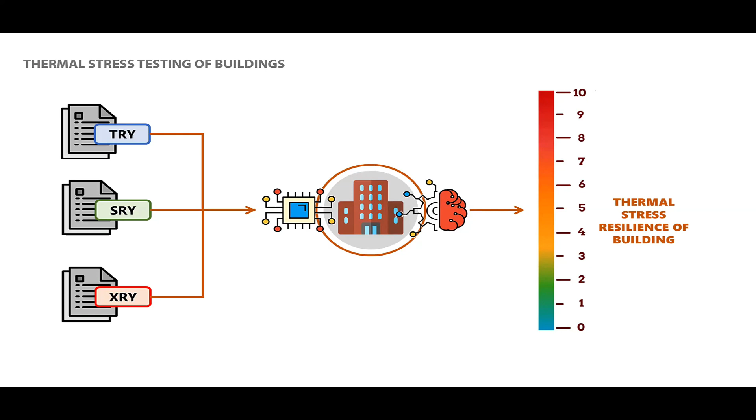So one of the contributions that ZED-i is also making is providing a method or a framework for thermal stress testing of the building. Ultimately, the intent of ZED-i was to provide an assessment of how stressed your building is and how to minimize that thermal stress. So that is where we are talking about peak loads. So we are in the process of developing a system where we don't have to simulate the building multiple times. Rather, we have a very short run for simulations while we are able to assess the thermal stress in the buildings.

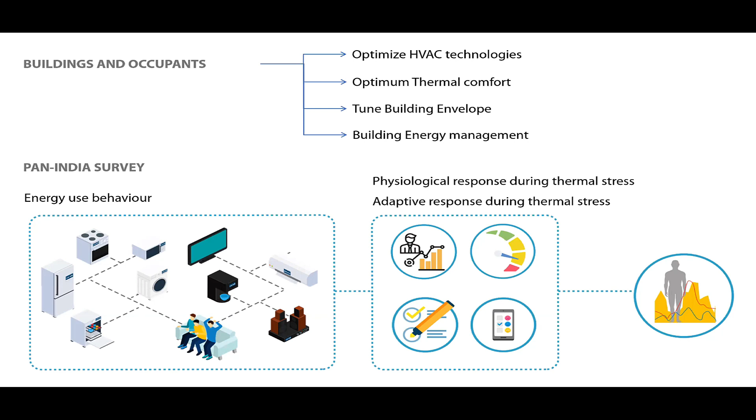Again, as a part of this effort, we have been doing a pan-India survey on 2 different aspects. One is on energy use behavior. We developed a few IoT-based monitoring kits. Just like Dr. Rajat was saying, we had issues with the Wi-Fi or cellular-based connectivity, so we went in for localized storage and distribution of data. Then in parallel, we have also just completed a large-scale subjective assessment of thermal stress in buildings. I'm going to share some insights on that.

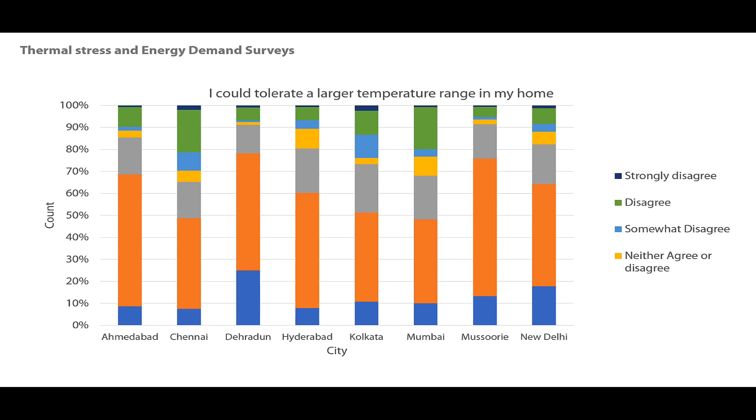If you look at Indian residences, we found in a lot of these houses, people are tolerating temperatures. This is a little alarming signal, as I would sense it, because the moment you have a better economic condition, people would prefer to go for air conditioning. This also reasons out the exponential increase in the air conditioning load or demand that is happening in India currently. If you see most of the cities, people say they agree to tolerate a large temperature in their home. Plus, if you see how their homes are during summer, most of them feel that the house is either warm, hot, or at least slightly warm.

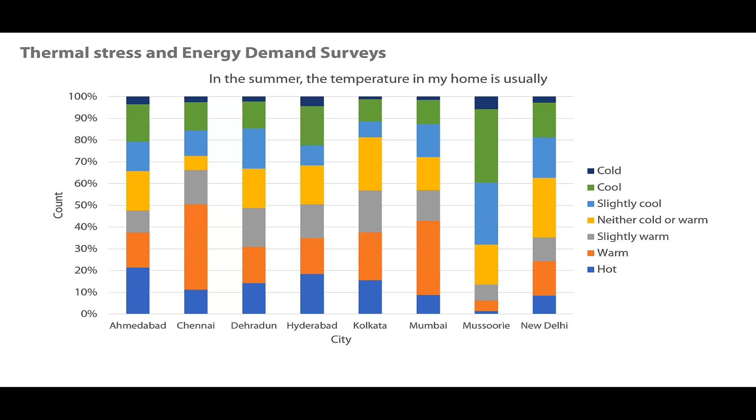If you again connect it back to the thermal comfort adaptation surveys that we have been doing in India, you would see that there is a very thin line between thermal acceptability and preference. This thin line eventually merges once the socioeconomic status goes up. So these are a few insights. Then we started connecting it with what happens to people and their physiological response. What are they really experiencing in these houses? We are also measuring houses.

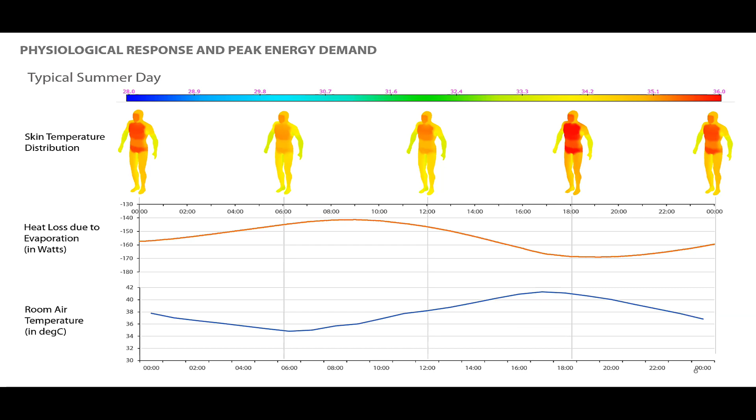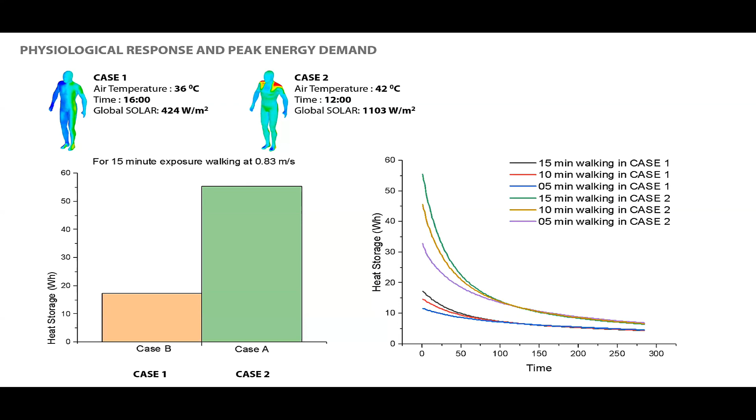We are simulating a lot of them. So we are in the process of mapping and kind of establishing what people undergo when the building is thermally stressed. Again, naturally, this corresponds with your heating, cooling, energy demands as well. So we have been iterating a lot of cases with ZED-i. I'm just moving a little fast for time considerations.

Plus, there was some mention about the difference between peak and mean energy demand. That was one of the mandates of ZED-i. Are these really two different problems? Yes, we could establish that these were two really different problems. So in a way, we were able to see what happens when we optimize a building for peak demand versus when we are optimizing it for mean demand. Though they are not totally different directions that we are traveling, the magnitude of interventions are completely different.

So when we have a so-called optimized building for mean energy demand using the typical weather files that we usually adopt, then the buildings are experiencing almost critical thermal stresses and very high energy demands, which were never predicted when the buildings were conceptualized and designed.

So we also moved on with uncertainties because we had a lot of data from people, their requirements, the way they operate their buildings, their appliances. We are also able to now establish what is the kind of demand uncertainty and what are the variables which are really impacting them. Like if you look at AC set point temperature, it has a very strong binding on the uncertainties which we end up with in the building energy demand. Weather files, as we see, have a very clear cut on the uncertainties that we incur in our energy demand prediction.

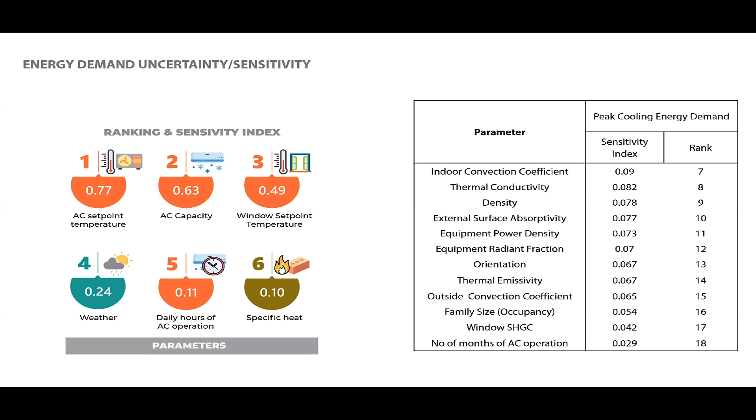So as a part of this project, we are also tuning HVAC systems. In this case, we have been able to design and fabricate a ground source heat pump system. In this case, we have a 5-ton ground source heat pump system. Now we also have an indigenously developed heat exchanger. So we have kind of fabricated and commissioned it. We are in the process of running the test. This is the second year the tests are running.

We are comparing it vis-a-vis the best-in-class system available in the market, a standard system. So we have a lab equipped with both these systems where we are measuring both the system as well as the heat pump's coefficient of performance. So we see a fairly good performance, but the mandate of the project is slightly beyond that. It is tuning the system itself in terms of its design as well as operation.

Currently, we are in the process of operational tuning. For example, how long is the warming up period or cooling down period? As we all know, a ground source heat pump is not for 24 hours operation. So we are looking at how to circumvent these peak conditions. When do we really cool down the system? When do we again operate the system? What is the kind of time frames that we should be looking at? That work is currently happening on our side.

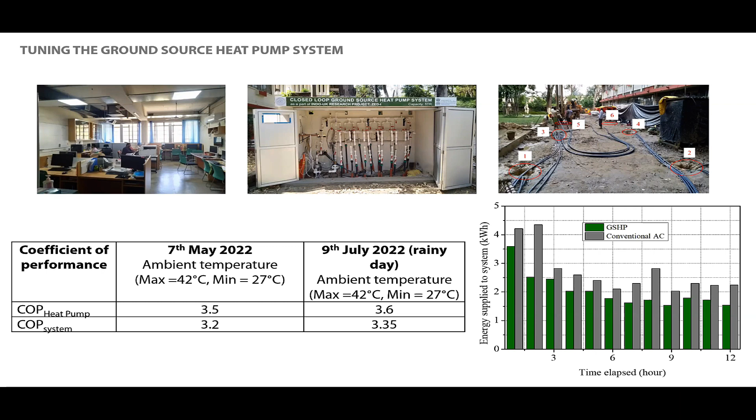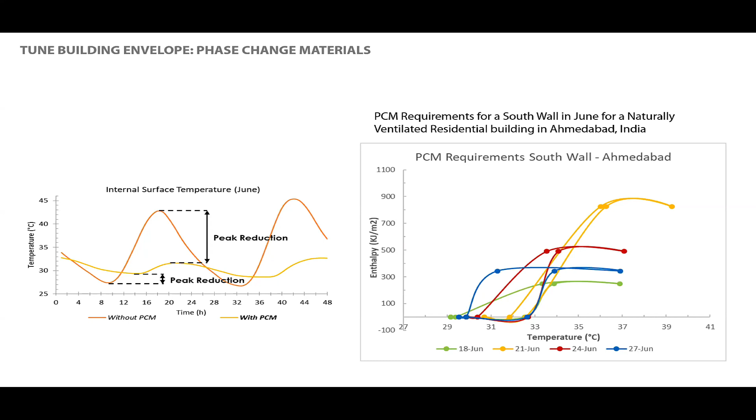Just before I summarize, we are also looking at building envelopes, tuning of building envelopes, with specific interest in phase change materials. As you know, it is a dynamic system. So we are looking at some sort of framework to assess what is the right PCM, what is the method to choose a PCM for a building. So instead of saying we are optimizing or developing a new PCM, we are rather providing a broader framework with which we can pick the right phase change material, including its choice, its assessment, as well as its performance testing. So we are in the process of developing and standardizing these procedures as well.